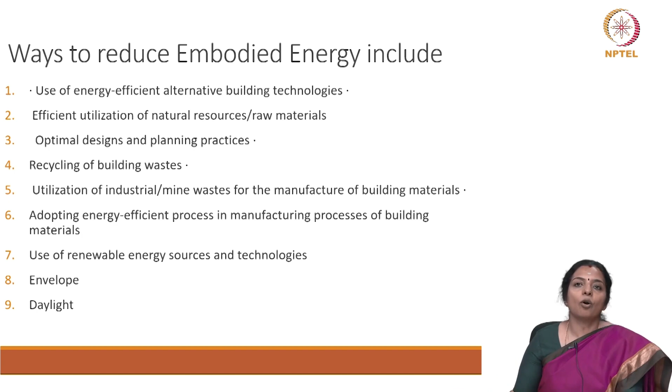We also saw the use of energy efficient alternate building technologies. We had a glimpse of efficient utilization of natural resources and raw materials. We saw how earth-friendly materials can be used in architecture. What are the optimal designs and planning practices? What is the significance of recycling of building wastes and the utilization of industrial or mine waste for the manufacturing of building materials? How adopting energy efficient process in manufacturing of building materials help us reduce embodied energy of those building materials? What is the use of renewable energy sources and technologies in reducing operational carbon?

Now, why is reduction in energy consumption in buildings so important? Now, as centers of our social and economic lives, buildings are also the source of a great share of our environmental impact. The International Energy Agency, IEA, estimates that nearly 60% of the world's electricity is consumed in residential and commercial buildings. The building sector is responsible for 1/3 of the total resource consumption globally. And the Intergovernmental Panel on Climate Change, IPCC, estimates that by the year 2030, greenhouse gas emissions from buildings will account for over 1/3 of the total emissions.

But the building sector represents a hugely untapped potential for emission reductions. With proven and commercially available technologies, energy consumption in both new and existing buildings can be cut by at least 30 to even 50% within the lifespan of the building. The United Nations Environment Programme has stated that no other sector has such a high potential for drastic emission reduction, and that the built environment offers some of the most cost effective and expedient ways to contribute to climate change mitigation. The consumption of energy and emission of carbon in buildings is made up of two types. One is the embodied energy and another is the operational energy.

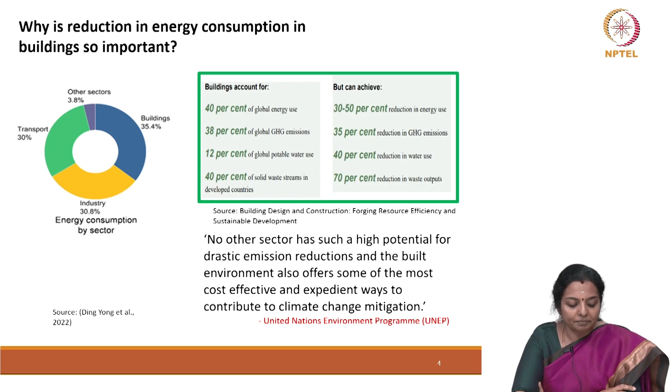Now, in India, the real estate and the construction sectors account for about 32% of the total greenhouse gas emissions, and these cover both operational and embodied carbon. Currently, Indian buildings account for over one third of the total annual carbon emissions, and these are projected to emit 7 times more carbon by the year 2050 as compared to the year 2005. However, forward looking built environment players are increasingly backing the move towards net zero and ambitious sustainability commitments.

India's real carbon saving potential lies in the assets that are yet to be built. Estimates suggest that about 70% of India's 2030 urban infrastructure is yet to be built, which highlights the need to minimize the associated embodied carbon. Currently, governments and private stakeholders are largely focused on reducing operational carbon emissions, while in comparison, embodied carbon remains more challenging to track. It is also difficult to track the embodied carbon emissions and also to record and report.

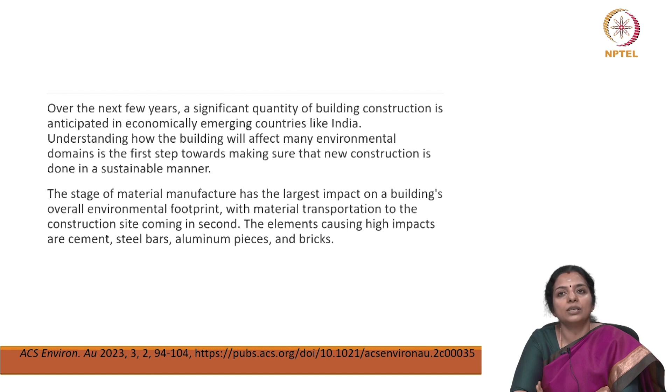Material transportation also consumes a lot of embodied energy. One therefore needs to focus more on locally available building materials and also look at earth-friendly transportation methods to the construction site. The building materials which are very high in embodied energy are cement, steel, glass, aluminum, brick, and plastic. These are the widely used building materials today. As architects and designers, you need to rethink the usage of high quantum of these building materials.

Since buildings in India account for 35% of all energy generated, the first environmental impact category is energy use, which relates to the nation's Sustainable Development Goal number 7, improvement in energy efficiency. The second impact category, global warming potential, measures how human-caused greenhouse gas emissions affect the atmosphere's ability to absorb heat radiation, or radiative forcing. This raises Earth's temperature, which has a negative impact on ecosystem health as well as human health.

Massive volumes of greenhouse gas emissions occur during the production and processing of building materials such as steel, concrete, glass, cement, bricks, etc., and during construction operations using inappropriate fuel. This must be taken into consideration when one chooses a building material. This metric is crucial for monitoring the nation's advancement towards Sustainable Development Goal number 13, climate action.

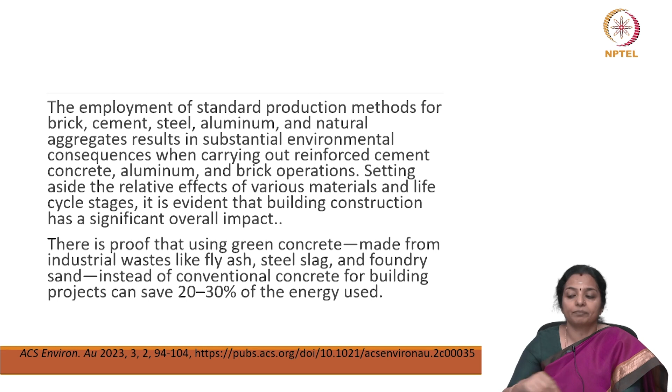It is possible to decrease energy use and to reduce carbon emissions, air acidification and particulate matter emissions by 70 to 90% by using locally and naturally occurring cob earthen material such as clay, sand, straw, and the other renewable materials that we have seen during the course of this study.

Instead of using conventionally processed high energy intensive building materials such as concrete masonry, one can really look at alternate building materials. When compared to traditional concrete, carbon emissions can be reduced by employing concrete constructed from recycled concrete, industrial or agricultural byproducts, recycled crushed clay brick aggregate, and cement-replacing materials such as rice husk ash, palm oil fuel ash, and palm oil clinker powder.

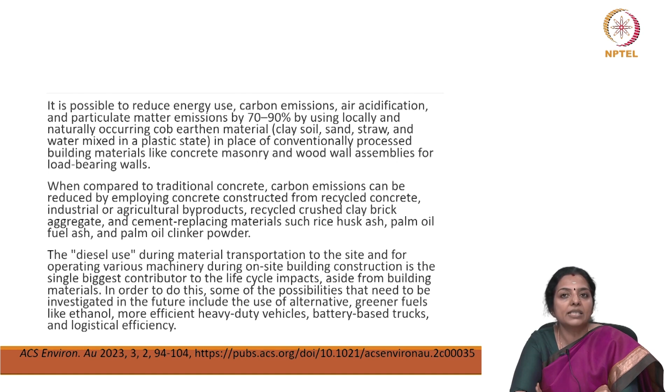The use of diesel during material transportation to the site and for operating various machinery during on-site building construction is the single biggest contributor to the life cycle impacts, apart from building materials. In order to address this, some of the possibilities that need to be investigated in the future include the use of alternative greener fuels like ethanol, more efficient heavy duty vehicles, battery based trucks, and logistical efficiency.

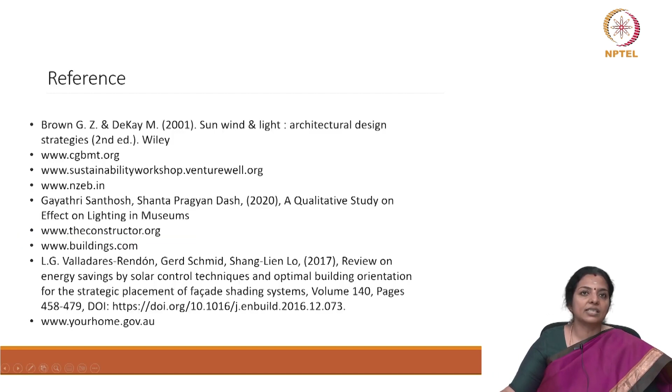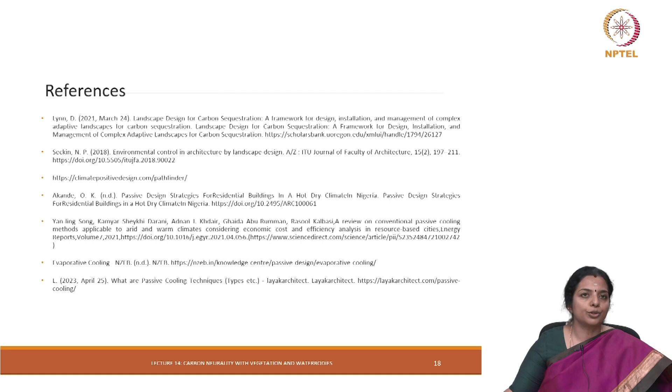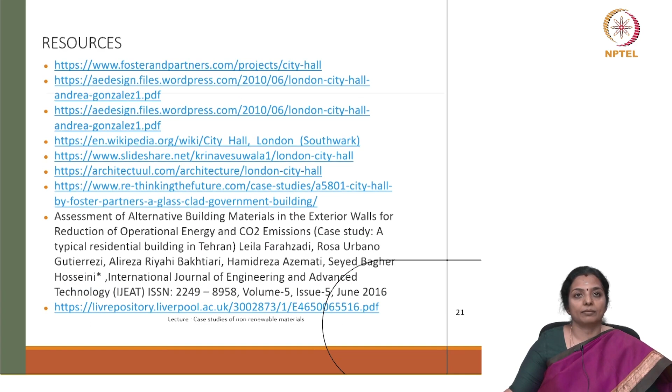So what we have seen during each of these classes that we have taken all amounts to this: architects, designers, civil engineers, and clients have a huge role in reducing greenhouse gas emissions and global warming. This can be done through first understanding whether there is need to scale up the project or to downscale the project. The architect plays a crucial role in counseling the client to have a scaled down, build less approach.

Even when one has to build, try to look at the options that you have in terms of building materials and construction technology. Try to go for renewable building materials. Try to go for locally sourced building materials. Adopt all simple passive techniques. Try to adopt advanced passive techniques.

I have not covered advanced passive techniques in this course, and I have only hinted upon simple passive techniques in this course. These two could form part of another course wherein simple passive techniques and advanced passive techniques can be taught in detail to students, all aiming towards reduction in embodied energy and operational energy.

Also try to design building envelopes which are sensitive to climate. We have hinted upon low energy envelopes. Lighting consumes a large part of energy. Try to avoid artificial lighting and replace artificial lighting with natural daylight. This can be done by appropriate design. If artificial lighting is needed, one should go in for energy saving fixtures.